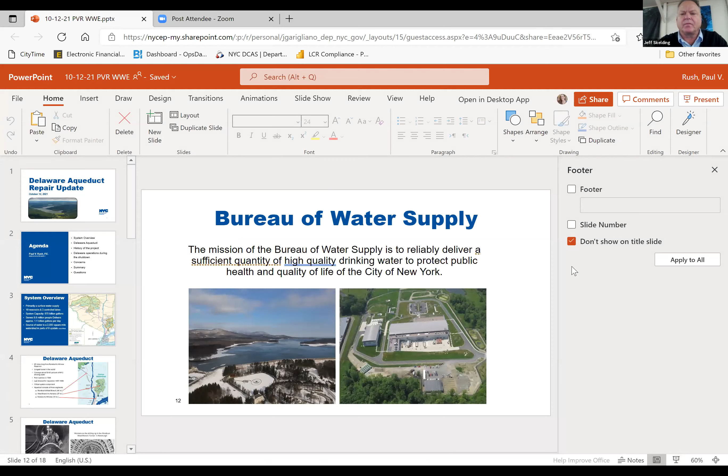So Jeff, thanks for that kind introduction. The big event coming up next year is going to be a shutdown of the Delaware Aqueduct for 6 to 8 months in order for us to repair the aqueduct.

And when I started with DEP in 1992, the thing I did on, I guess, the second day at work, I went over to New Paltz for a meeting about releases with DEC, DEP, a bunch of old timers that had just wrapped up discussions about a new releases plan. This was what, '92. And then a couple of weeks after that, I went down to see a potential leak on the Delaware Aqueduct in the town of Wawarsing that was a real leak. So this kind of ties both of those things together. So here we go.

So this is what I'm going to cover. I'll try to move through the slide deck pretty quickly. Just kind of move these faces out of the way so I can see this. Okay, that's better. Go over a little bit on the Delaware Aqueduct, history of the project to repair it, our operations during the shutdown, some of the concerns we heard, and give some time for questions. I'm going to move pretty quickly through the slide deck. There are 18 slides.

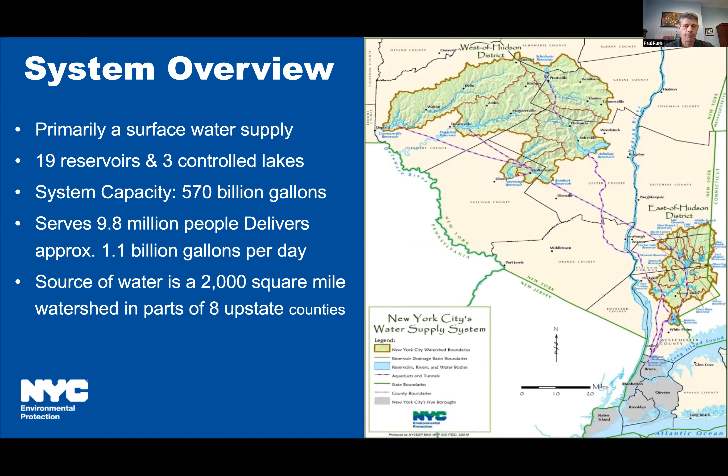System overview, New York City water supply system, 19 reservoirs, 3 lakes, 570 billion gallons of storage, serves 9.8 million people. This is updated on the most recent census data from New York City, which showed a population of 8.8 million. Deliver about 1.1 billion gallons a day.

The Delaware Aqueduct. So the Delaware Aqueduct is still in the Guinness Book of World Records as the longest tunnel in the world, longest continuous tunnel at 85 miles long. Provides between 50 to 60% of the city's water supply. It was first put into service in 1944 on an emergency basis during World War II. In 1948, it was put into permanent service. The last time it was inspected was in 1957 to 1958, was drained, drove a Jeep through it, and we haven't been inside it since then.

It obviously is a critical component to the water supply system. It consists of 3 segments, from Rondout Reservoir to West Branch Reservoir, then from West Branch to Kensico, and the final leg of it goes from Kensico down to Hillview. The section between Rondout and West Branch is the area where we have identified leakage. The other sections, there's no leakage to our knowledge. So that's where we'll focus on, the Rondout to West Branch section of the aqueduct.

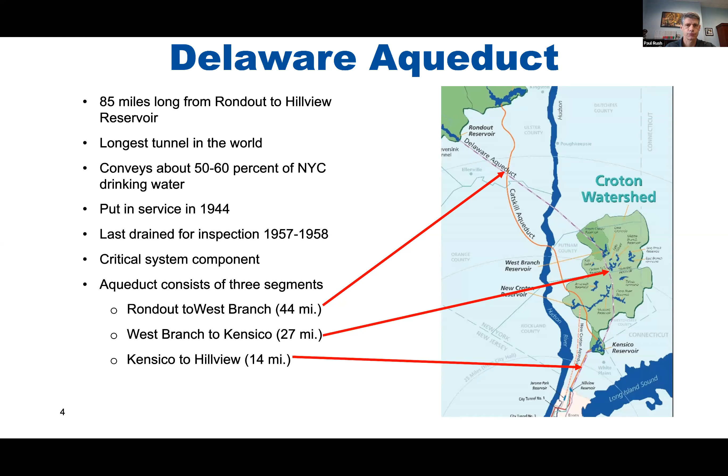So when the aqueduct was built, it was built primarily through sedimentary rock, shale for the most part. But there were 2 spots where there were challenges of going through limestone formations. Those were in the Rondout Valley and then approaching the Hudson River. And in those sections, there were steel liners put in to help give the tunnel strength in those areas.

And you can see from the pictures here from the archives, construction techniques then were different than they are now. It was drill and blast. They'd use that device on the right-hand side there called, it's not a jumbo. It's a device where they were able to drill a bunch of holes into the face of the rock and then blast and then go back in and dig out the rock and remove it out of a shaft site. Today, we use tunnel boring machines for the most part in our tunneling techniques.

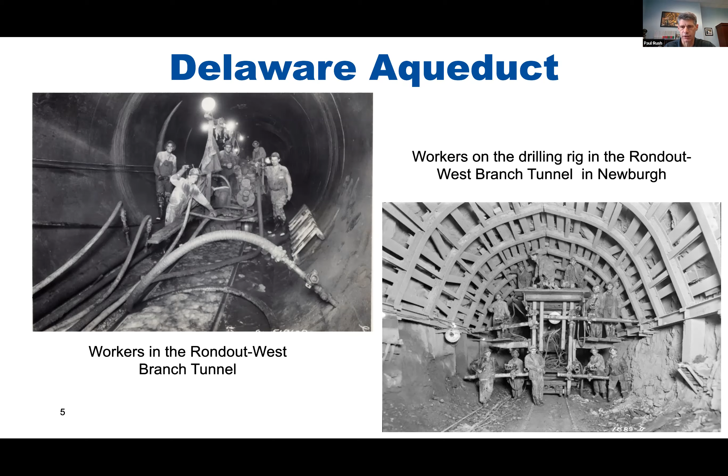So the leaks on the Delaware Aqueduct were first identified adjacent to the Hudson River, where Central Hudson Gas and Electric Corporation operated the Roseton Generating Station. They notified DEP that they thought there was a leak. And subsequent to that leak, back then, we'd periodically treat water as it moved from one reservoir to the next

with copper sulfate when we had very, very high phytoplankton counts. And we did some treatment at Rondout back in 1990. And we were able to identify that same copper was picked up at Roseton. So it was 100% confirmation that the water coming out adjacent to the Hudson River there in the town of Newburgh was Delaware Aqueduct water.

A little bit later, we were contacted by a homeowner in the town of Wawarsing who had water on her property and noticed that the water had gone away and asked if we had been working on the tunnel. It turns out we had shut down the tunnel for a couple hours and the water went away. And that was what I was assigned to follow up on, was that leak and monitor it. And we did a lot of work to try to understand the leakage.

And we calculated the leakage would vary from about 14 million gallons a day to as much as 36 million gallons a day, depending on what flow we were pushing through the tunnel. And it would only go over the 30 million gallon a day at our highest flow rates, which we typically don't operate the tunnel at anymore. So on a typical day, we're losing about 20 million gallons of water a day. So that's the amount of water that would be saved from the system when we fix the repair.

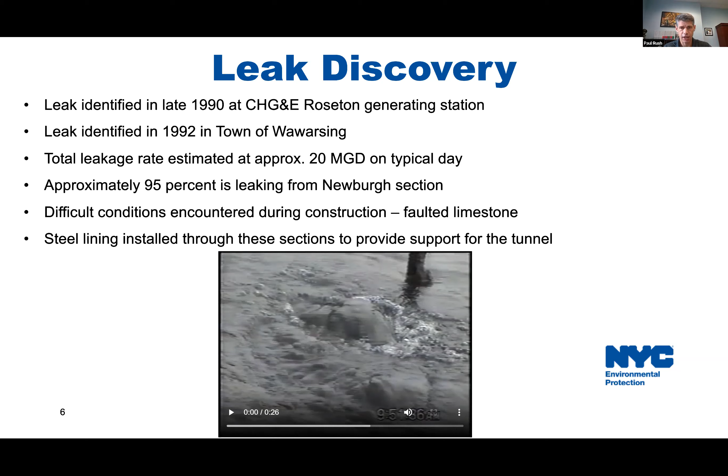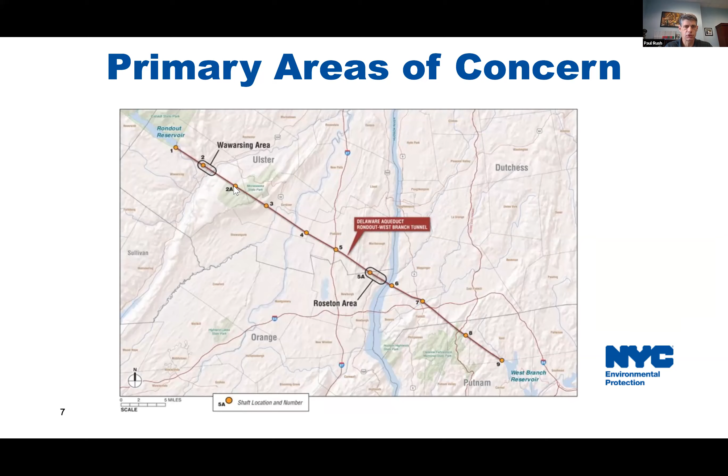And when we do the repairs, which I'll get to a little bit, we'll be doing a bypass tunnel under in this section, and in the Wawarsing section, we're actually going to go in and grout the small area of leakage by going into shaft 2A, which is in the Shawangunks at about 2,000 feet.

So we had a leak. We knew about it in 1992, and we knew we had a problem, but fixing the problem was something that would require a lot of work and understanding to try to figure out what we were going to do about it. Because at that time, demand was much higher in the city, and going without the Delaware system for any extended period of time was something the city would not be able to get through at all.

So one of the first things we did was to try to do a look through in the tunnel. And we contracted with Woods Hole Institute out on Cape Cod and a company out of Canada to develop an autonomous underwater vehicle to drive through the tunnel, fly through the tunnel.

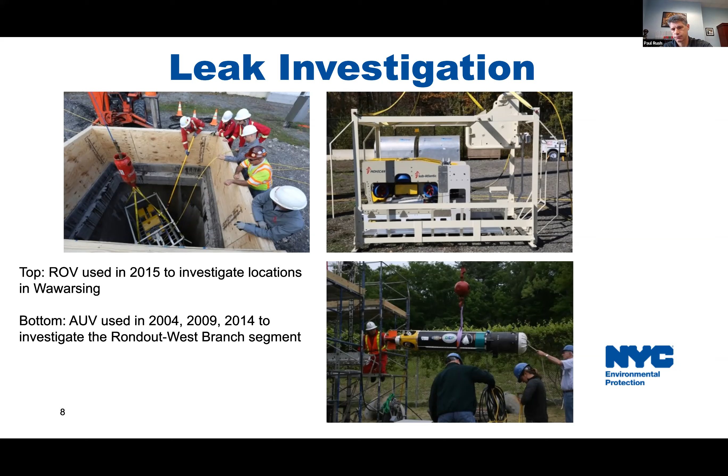But a lot of work was done in city to reduce demand, pushing out universal meter reading and eventually automatic meter reading that's really served to change behavior of customers to reduce use of water. We also had programs that replaced shower heads, toilets over time, and then just the developments in the industry and EPA standards with smart technology that uses less water has resulted in a tremendous drop in our demand, despite increasing population in the city.

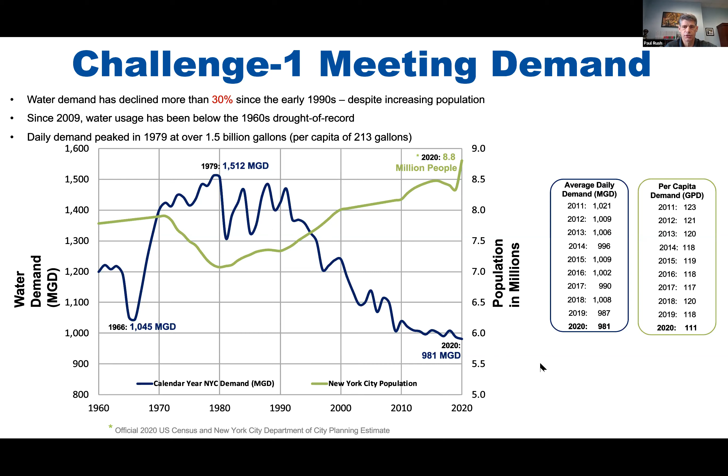So when we first were faced with this, one of the biggest planning things was where we were going to get additional water to be able to shut down the Delaware Aqueduct. And the thought at that time was we'd perhaps have to build an entirely new aqueduct to take the Delaware system out of service. First, build a new aqueduct, and then take it out of service. But as demand decreased, that really set the stage that we were able to develop a plan to fix the tunnel. And the plan that we came up with was build a bypass tunnel around that leaky section.

This is starting in Newburgh, going underneath the Hudson River, and then connecting it on the other side of the Hudson River around that leaky section. And this tunnel itself, this 2.5 mile section, is complete, and this final lining stage is what's going on right now. The last part of the work will be to build the connections into the Delaware Aqueduct. And when we build those connections, we can't have any water flowing through the aqueduct, so it will be unwatered. And for the time it's going to take us to make this connection and put the tunnel back in service, we're looking at 6 to 8 months.

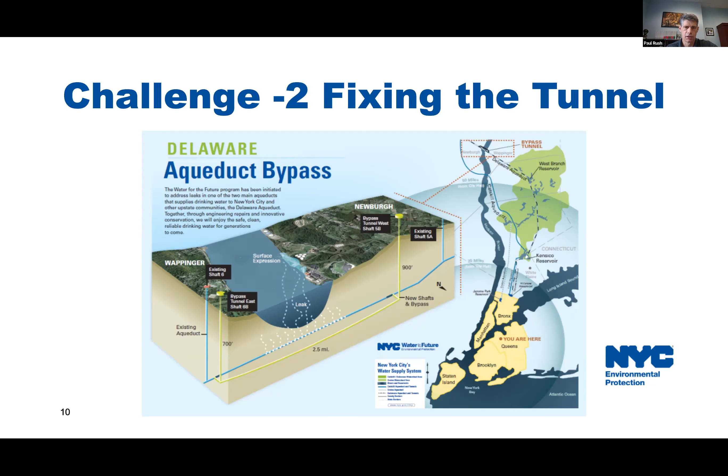And while we do that work to connect the bypass tunnel to the existing tunnel, we'll also be working up in Wawarsing to do the grout repairs in that section of the aqueduct. So the shafts were completed in 2017, the vertical sections down into the tunnel. We built out these bell-out chambers that allow us to access equipment and work to get in and build the main tunnel at the same time.

The tunnel boring machine got through the tunnel in 2019. The rock was brought up on the Newburgh side and was actually placed on a section of land that we had purchased adjacent to the site, which saved a lot of truck traffic from driving up and down Route 9W there. The steel liners were installed and the final concrete lining of the bypass tunnel was finished in March of 2021.

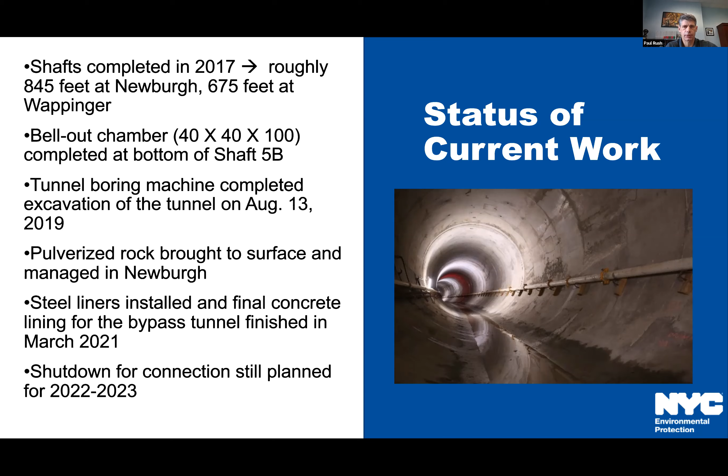And there's still prep work that's going on right now to make that connection, which is planned to start in October of next year, so about a year from today. And we expect to have that work complete and the Delaware Aqueduct restarted by April. The plan is to do it in one season. We have contingencies. If there's a problem, we need to bail out and put the tunnel back in service, the old tunnel, or a partially completed new tunnel, where it could take up to 3 seasons to do, but we expect to do this in one season.

So Bureau of Water Supply, our mission is pretty simple. We reliably deliver high quality drinking water to protect public health and the quality of life of the city of New York. And this is just an aerial on the left-hand side of Ashokan Reservoir and the Catskill-Delaware UV plant down in Westchester County, where all of our unfiltered water that comes out of the Catskills is treated.

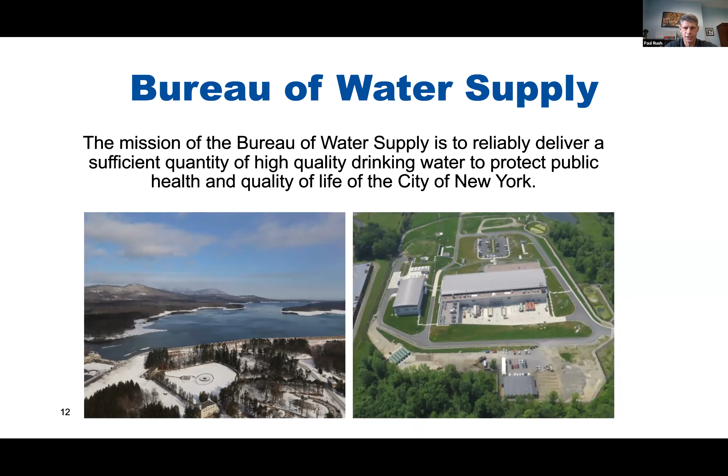And to do that, getting water to the city is number one, and the essential task is to make sure the city has enough water. We also have the essential task of meeting all of our commitments regarding reservoir releases and limits on our diversion. And we do this to make sure we have a dependable supply. We try to divert the best quality water available while maintaining a balanced system.

And at the same time, what we change over time is we also look for water that's not going to be diverted for consumption, that it provides the best use downstream. So we've worked to provide habitat benefits and also provide voids to increase the flood attenuation the reservoirs provide. And this is Cannonsville Reservoir from back in 2001, when it was about 3% capacity. And this is record elevation at Cannonsville Reservoir from the floods of June 2006 on the bottom.

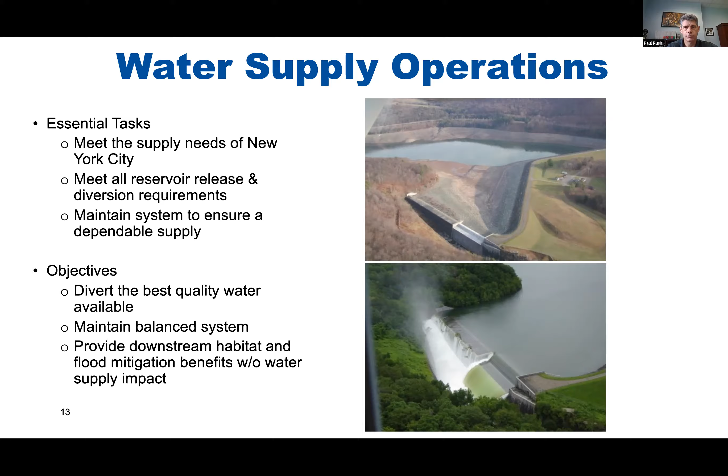So when the Delaware Aqueduct shuts down, we're going to need to make up additional water from other parts of our system to get through. And right now, the Catskill Aqueduct is shut down to do the final stage of work to increase the capacity and reliability of that aqueduct for the Delaware Aqueduct shutdown next year. The Catskill Aqueduct had a capacity of about 590 million gallons a day most recently. There's some documentation that shows when it was first placed in service, it could deliver up to 640 million gallons a day.

The work we are doing right now and have done over the past 3 years has been to remove biofilm that's built up inside the aqueduct, and also to repair leakage that we've had in certain spots on the Catskill Aqueduct. The Catskill Aqueduct essentially is a cut and cover aqueduct close to the surface. It's easier to access than the Delaware Aqueduct. We've scraped off this biofilm, and that reduces the roughness of the aqueduct, which should allow more water to push through.

But the Catskill Aqueduct is an open channel flow aqueduct, so it flows more like a river than a pipe. And unless we are successful in removing biofilm and dealing with friction issues along its entire length, we could do 90% of it, but if there's a bottleneck, you're not going to get the increases in capacity. Some of the preliminary work has shown that for the same amount of water, we can move at a lower depth than previously, so it's moving with more energy. We hope to get greater than 600 MGD out of the Catskill system for the shutdown next year.

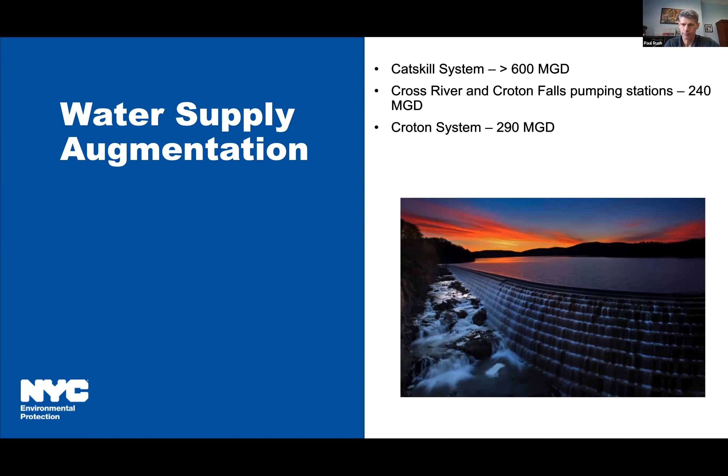So for the Delaware Reservoir operations during this time, we did a lot of modeling to support our operation plan that appeared in our EIS. And we did model to make sure that after we do the shutdown, we're able to refill the system by the spring of 2022.

So ahead of the shutdown, that means starting this year, coming up into 2022, we're going to favor the Delaware system and take more water out of the Delaware system to bring down storages in Pepacton, Cannonsville, Neversink reservoirs, in addition to Rondout Reservoir ahead of the shutdown. So we'll take more water out and lower them. And then during the shutdown, we're just relying on the Catskill and Croton systems.

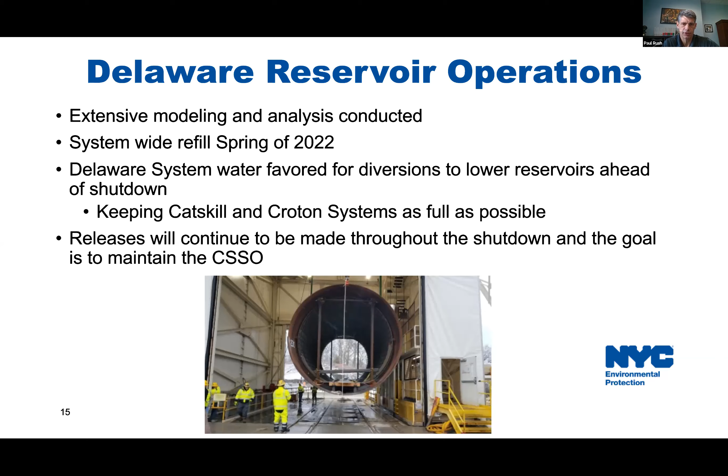Releases will be made throughout the shutdown with the goal of keeping storages below the CSSO. So we'll be very proactive in lowering the storages ahead and making releases to keep those storages down below the CSSO during the shutdown.

Concerns we've heard: reservoirs being too full during the shutdown, installing siphons at Pepacton, Cannonsville, and Neversink reservoirs. We're going to be operating to keep the storages low during that time through releases. We have that flexibility under FFMP to look ahead in terms of understanding releases.

Like, we've had these very large releases that have been going on for some time out of Pepacton, Neversink, and Cannonsville as a result of the tropical storms that we had recently. There have been questions about why we've been keeping them up so high. We've been trying to get the system under the CSSO and keep it there. And we've been taking quite a bit of water out of Cannonsville as well into Rondout. We've begun to decrease the releases a bit out of Cannonsville.

There will be siphons installed at Rondout Reservoir. The reason they're there at Rondout Reservoir and not at the Delaware reservoirs: at Rondout, normally most of the water leaves out of the Delaware Aqueduct, and we have a very, very small release mechanism at Rondout that only provides a max release of 15 million gallons a day. So that's why they're installed there.

We spent a lot of time planning this work. It was a public process, more than 20 years in the making. We're using the best models we have, the best forecast information we could get. And although we don't have a crystal ball to predict the weather, we'll be watching elevations and taking proactive actions to make sure we meet our commitments during the shutdown.

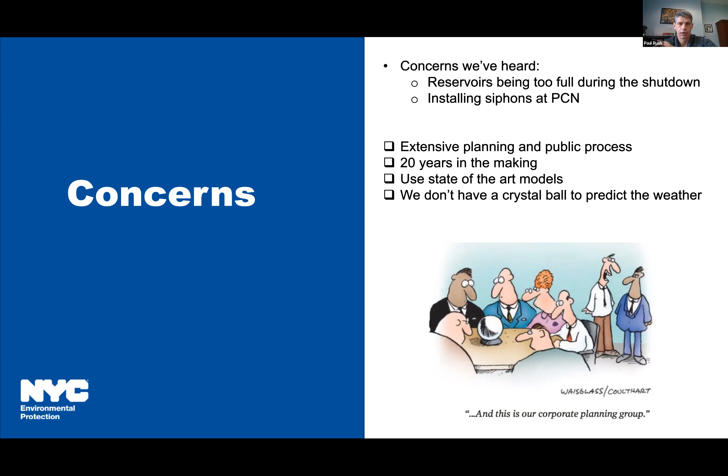So the system itself has benefited from wise investments in infrastructure over time. Fixing the Delaware Aqueduct makes for a much more reliable system. It's definitely 20 MGD less water that will be lost from the system. That means more water is available for other uses.

We have to maintain a state of good repair, stay on top of the research, regulatory trends, climate change, and others, and adjust our operations as necessary. And it's important for us to also maintain dialogue, listen to concerns, ask questions, and be as completely transparent and open as we possibly can be.

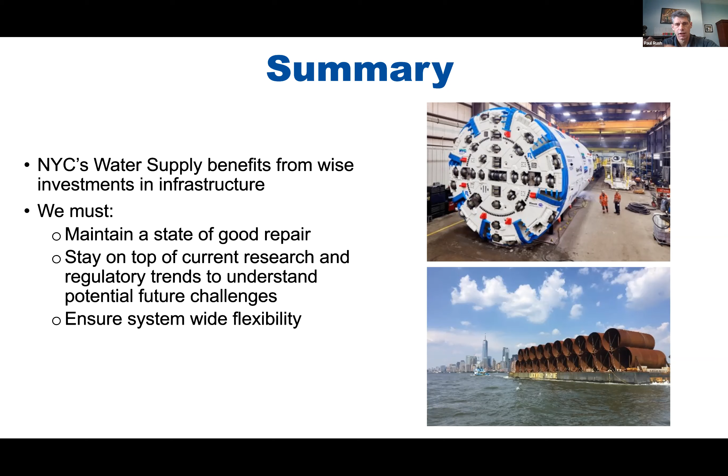What you see on the top is a picture of the tunnel boring machine that was used to bore the tunnel under the Hudson, and that steel lining that was coming up on a barge from Louisiana to be delivered in Newburgh and was put into the tunnel. So that concludes my presentation, subject to your questions.

Thank you so much, Paul. That was great. We do have a bunch of questions and a couple comments. Maybe most importantly, Dan Plummer wants to make sure you know that you have excellent lighting over there. Didn't want to forget that.

Thank you, Dan. And then Nathaniel Gillespie just put a compliment in here, noting that your water conservation work to decrease the water demand is excellent. And then we have a couple of questions about what's happening with that 20 million gallons per day of water that will be saved once the work is complete, and can it be used for conservation or recreation purposes?

So once we fix the leak, that's less water that's leaving the system. And this is water that was coming out of the Delaware system. It makes more water available for other uses. So when the calculation is done on the FFMP determining what table we're in, that's 20 MGD more water that's available in the system that's not being wasted, effectively reducing our demand by that much.

During the shutdown of the Delaware Aqueduct, we're going to be relying a lot on the Croton system, and operating a filtration plant, the one at Croton, which is something we had never done before until 2014, 2015.